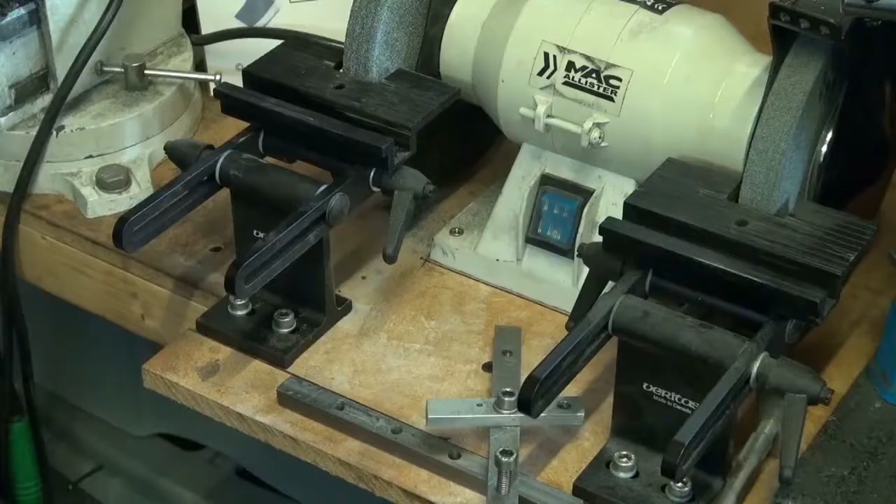Right, we're at the grinder. I have turned all of 30 degrees to reach it. As I said, it's a very small, cheap £20 grinder from B&Q.

What I've added to it, because when you get them standard, they've got a very small, so-called adjustable rest, but all it does is follow the grindstone in as you wear it away. It doesn't adjust to any angle or anything. So I bought these two Veritas adjustable stands for grinding. I think they mainly set them up for grinding blades for wood planes and chisels. But when I saw them I thought, with my problems, they might be able to adapt them to do the job.

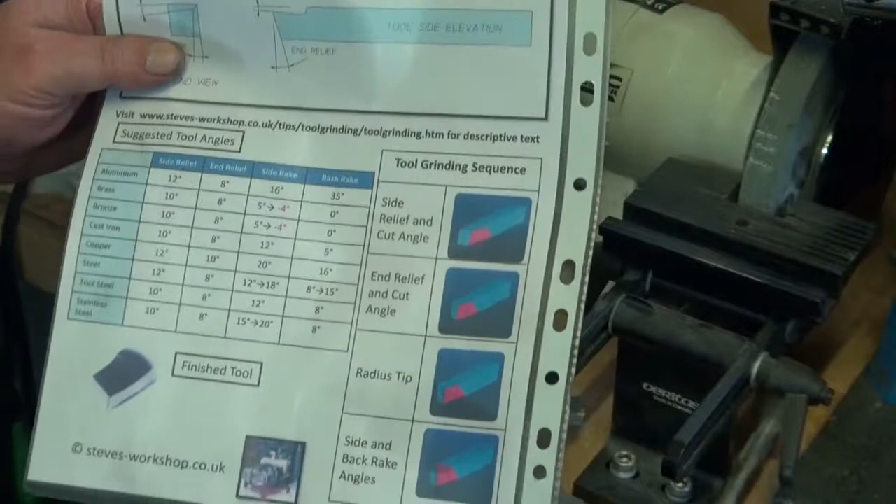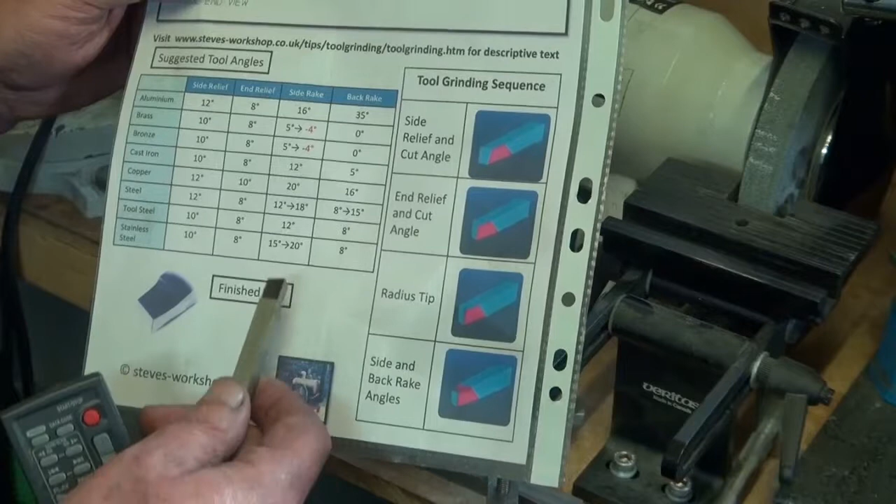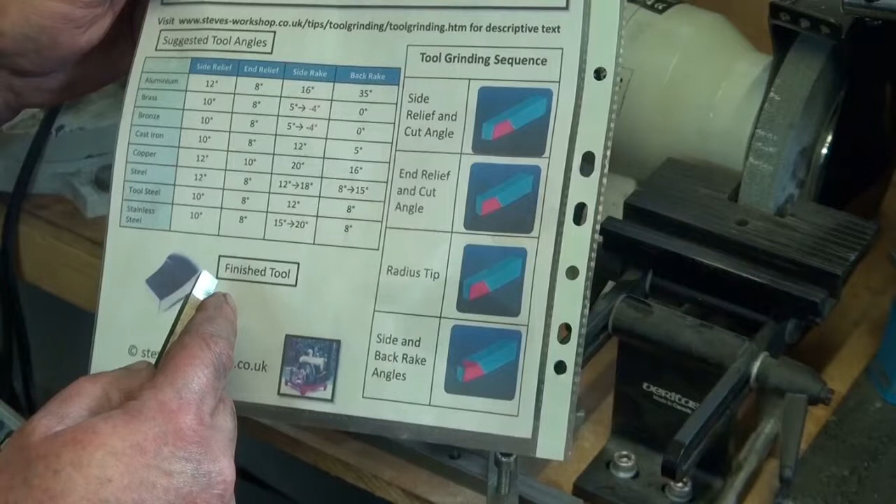Now, all the data I use for grinding my tools I get off the internet, and this came off one site, I can't remember what it was, steves-workshop.co.uk. He gives suggested angles for cutting different materials, but in the main it appears the end relief of the tool is 8 degrees, the side rake can be anything from 16 to 20, and back rake 5 degrees up to 8 degrees.

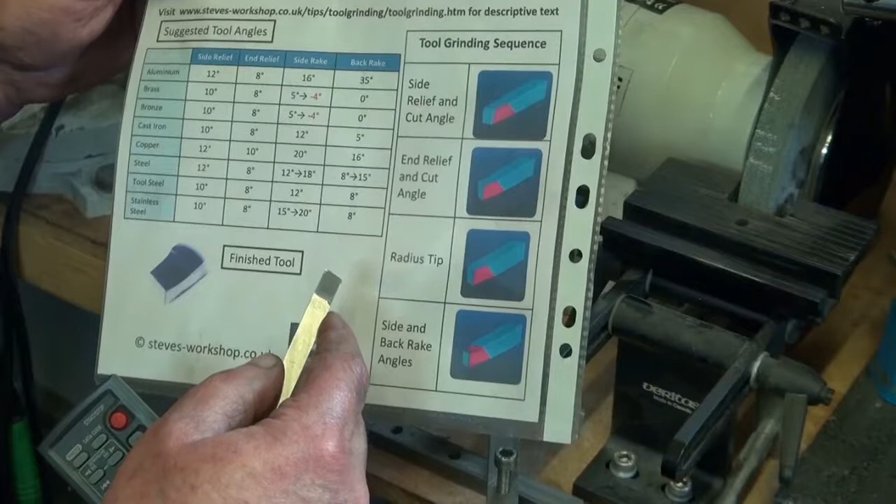So what I've done, I've set both of these adjustable tables to 8 degrees. I did that by grinding the tip, the stock tip which comes on these. They've already got a rake on them, but that's about 15 degrees.

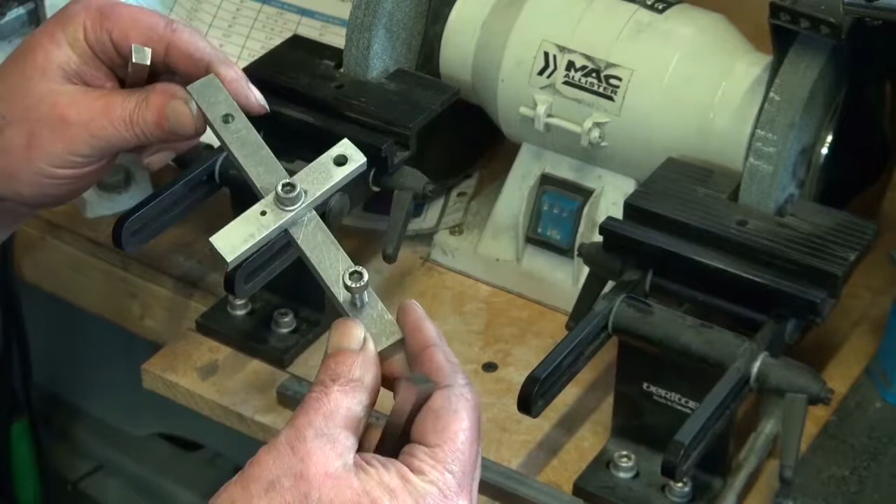So what I did, I made this contraption that slides in the slots in these two things. I just got an M6 bolt and a piece of scrap bar, and I can slacken it off and set it to a right angle, or 8 degrees, or 15 degrees. I can set it to any angle, and it helps me attain the perfect cut and the perfect angle. So when this is at 90 degrees, I go up to the stone.

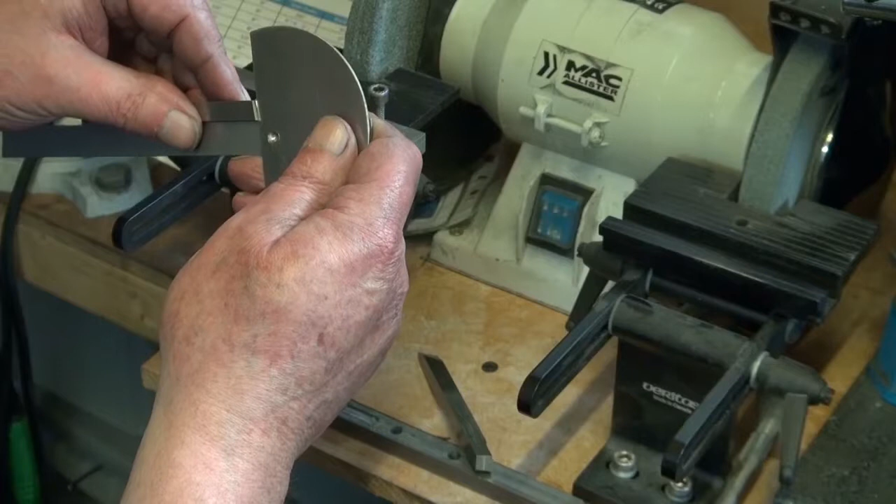This is the rough stone, that's the smooth stone, and I rough it off until, by measurement, I get 8 degrees on the tip using the likes of this. And I say at the moment those are about 15 degrees. I've set this to 8, and I've set these to 8, so I get 8 degrees on the tip.

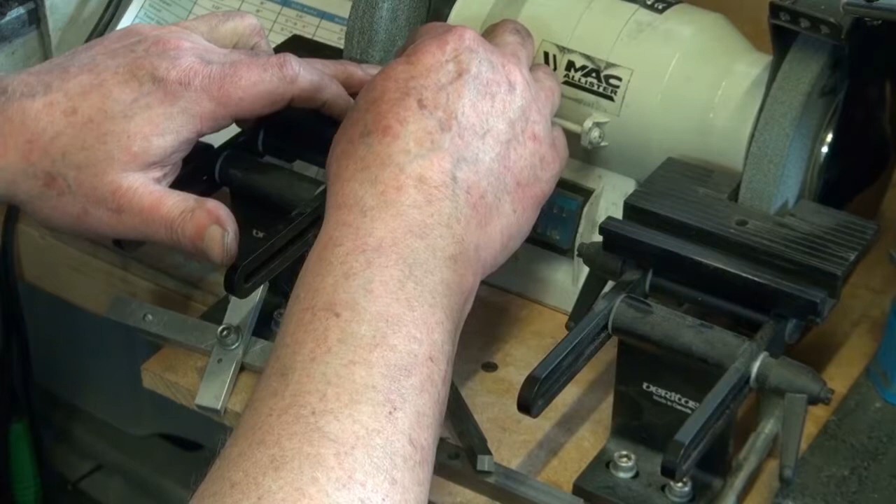And the success I've had so far has been able to get that 8 degrees quite easily on the end. And then for the front relief, you can turn it like that and get your 8 degrees, and for the top relief you can turn it like that and get your 8 degrees. So it's a pretty general angle, but it seems to work.

I've made several tools. This is what I made this morning, it's a 45. So I set up my little steady for 45 degrees, cut one side off, turn this the other way, cut the other side off, and then just for a few seconds, transferring to the smooth stone, I can give it a couple of strokes to bring it up to sharpness, and then I stone them with a little oil stone, and they cut really well. That does me 45 degrees. I don't know if these are at all visible, but there's a 45 on that, and that tool cut it.

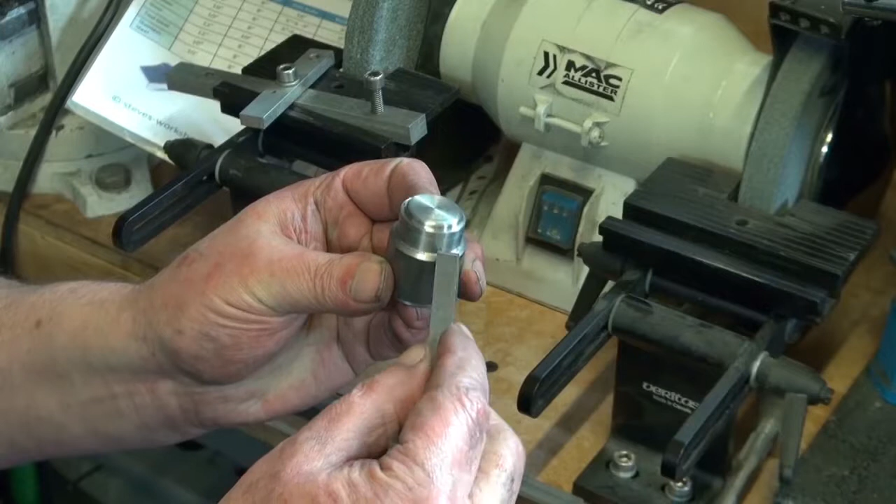I also machined the front and the side with, well, I haven't got it to hand, but another tool I made for cutting like that. I've got a tool I made the other day for threading, that's got 60 degree angles on it, and that cut a thread.

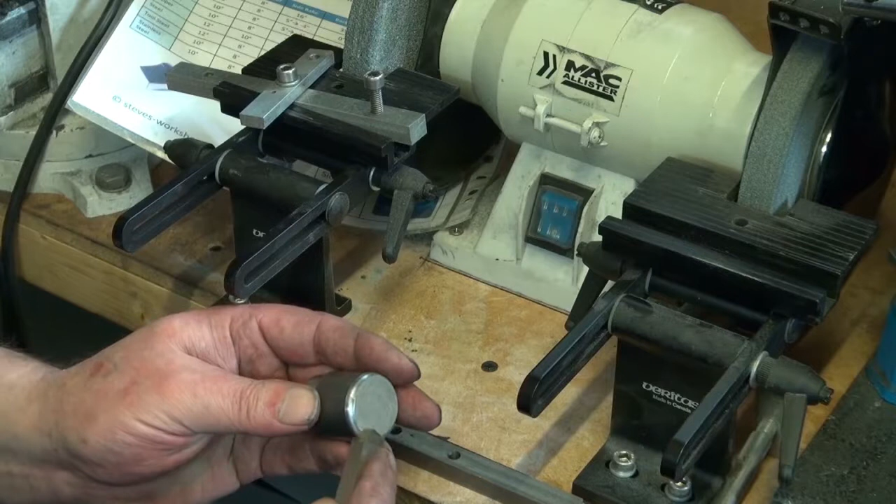And lastly, as you know, the only finish you can do on the end of anything with a lathe is either a chamfer or a square. But because I can grind my own tools now, I ground a form tool, and I can put a round on the end of things, and that worked. Anyway, I just thought I'd show how I overcome my problems to be able to grind tools.

And it's done very cheaply with this B&Q grinder. The only thing about grinding is the ruddy dust, and the other thing you've got to have with a grinder, cheap or otherwise, is a dressing tool. I've run grinders without dressing tools, and I didn't realise what these did, because they vibrate away like merry hell. But if you've got a dressing tool, you dress the stone, and as well as square it up, it brings it back into balance, and the machine runs quietly.

So that's my bit of knowledge about grinding. Not a lot, but I thought I'd share that, because it's got me out of a hole now. I can grind tools which work in my lathe, which I'm very pleased about.